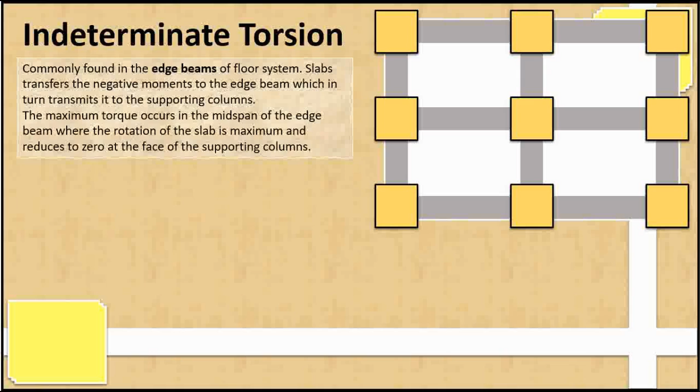Okay, pansinin natin itong floor plan na to. Sabi daw dito, nag-o-occur daw yung indeterminate torsion kadalasan sa edge beams natin. Pero hindi lang yung sa edge beams sa pagkakaalam ko, nag-o-occur din siya syempre dun sa ating mga middle beams. Kasi katulad na sinabi ko kanina, kapag naglagay ka ng beam dyan, tapos nag-produce ka ng load dyan, ang tendency is magpo-produce ka ng torsion about dito sa dalawang supporting beams niya. Ayun lang naman yun, pero ang kadalasan binibigay dito is yung edge beams talaga.

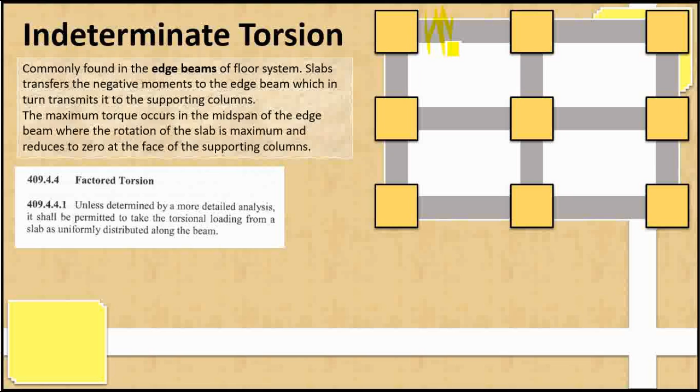Ayun, magbasa tayo ngayon ng mga code. So for the first code natin, factored torsion: unless determined by a more detailed analysis, it shall be permitted to take the torsional loading of the slab as uniformly distributed along the beam. Dito ang gagawin lang natin, hindi na natin bubusisiin kung ano yung mga torque na may experience per length ng beam natin. Hindi na natin papansinin yung variation ng torque along the beam, i-assume na lang natin siya agad as uniformly distributed.

Ayun nakukuha nyo. So proceeding sa next code natin, for the factored design torsion: if TU is greater than or equal to phi TCR and TU is required to maintain equilibrium, the member shall be designed to resist TU. In a statically indeterminate structure where TU is greater than or equal to phi TCR, and a reduction of TU in a member can occur due to the redistribution of internal forces after torsional cracking, TU may be reduced to phi TCR, where the cracking torsion TCR is calculated in accordance with section 422.7.5. If TU is redistributed in accordance with the section, the factored moments and shears used for design of the adjoining members shall be in equilibrium with the reduced torsion.

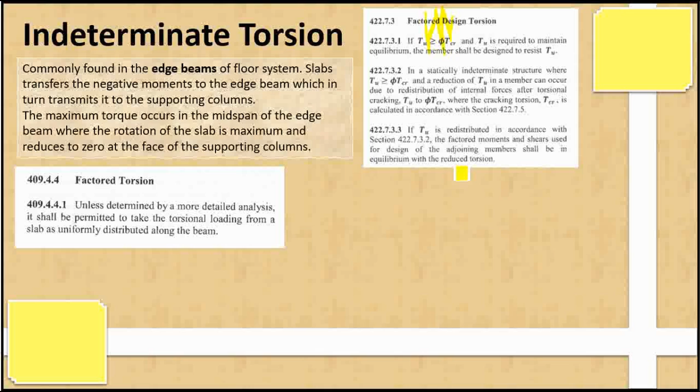So, ang haba, dami ko sinabi. I-define muna natin, alamin muna natin kung ano ba yung tinatawag dito ng cracking torsion. Ito yung cracking torsion natin, di ba natakpan ng beam? Yung cracking torsion daw natin, ito yung torsion na kailangan ma-experience ng beam natin, such as, magka-crack pa lang talaga yung mga extremes ng beam natin, kaya nga siya tinawag na cracking torsion di ba?

Ayun daw yun. So ang ibig sabihin ng factor design torsion na yung 422.7.3 na provision, ibig sabihin lang niya, kapag daw nag-exceed yung nakukuha na torque ng ating beam sa TCR niya, pwede na natin gamitin yung TCR as the critical torque na lang. Imbes na TU yung gamitin natin, TCR na agad yung lalagay natin kung nag-exceed yung TU natin dun sa TCR. Okay, and in turn, kapag ginamit natin yung TCR, i-redistribute natin ngayon yung uniformly distributed torque na ginamit natin. Mamaya, mas maiintindihan sana natin to kapag solve na tayo ng mga problem.

Alamin muna natin yung cracking torsion shall be calculated in accordance with table 422.7.5.1 for solid and hollow cross sections, pero ang gagamitin lang natin dito is yung solid cross section. At ang gagamitin natin dito is for non-prestressed member, which is ito. Pero kung binigyan naman kayo ng iba na hindi non-prestressed member, meron naman sa code, tingnan nyo na lang. Pero as for our case, ang gagamitin natin dito is itong non-prestressed member lamang.

Okay, may papansin nyo, meron tayo ditong dalawang unknown. Yung ACP natin, saka yung PCP. So ano ba itong dalawang to? Itong dalawang to is, for your information lamang, yung area na to and yung perimeter na to pertains to the gross section ng beam natin.

Okay, so gross section naman. So ano ba itong gross section na to? Bago tayo dumako dun, alamin muna natin itong code na to.

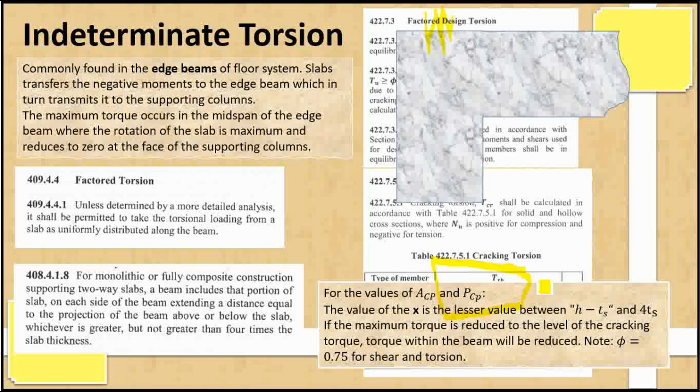Kung babasahin ulit natin yung code, di ba sinabi dito is projection of the beam above or below the slab. So yan yung H minus TS na yan. So dito sa slab na to, di ba ito yung slab natin? Ayan, yung slab natin to. Sa baba niyan, ito yung projection ng beam natin. Ito yung hina-highlight ko na section na to.

So ano bang height nito? Kung ito yung overall height ng beam natin, maminusan lang natin siya ng thickness ng slab. Therefore, H minus TS siya. And dapat yung value na yun is hindi dapat mag-exceed ng 4 times TS.

Pero ang alam ko, yung sinasabi dito na projection ng beam above. Kasi yung sinabi ko lang na to, below the slab lang siya. Yung above the slab na to, ito yun. Itong portion na to, okay?

Pero napakadalang kasi na mag-govern yung length na to. Kasi sabi dito sa code natin, pipiliin natin yung greater dito sa above and below. Pero dapat, yung value na makukuha natin sa dalawang yan is dapat hindi siya mag-exceed ng 4TS. Therefore, for simplification purposes, ang ginagawa na lang natin is i-compare natin yung H minus TS and 4 times TS. Kung sino yung mas maliit na value sa kanila, is sino yung mag-govern.

Okay, so I hope naintindihan nyo. Kung hindi nyo naintindihan, namnamin nyo muna yung slide na to. And if the maximum torque is reduced to the level of the cracking torque, torque within the beam will be reduced.

Okay, so ito yung sinabi ko kanina, na kapag daw nag-exceed yung TU natin, dun sa TCR natin, gawin na natin critical torque, yung mismo TCR natin. And, in turn, i-redistribute natin yung uniformly distributed torque.

Okay, so note that the phi, or the strength reduction factor, is 0.75 for shear and for torsion. All throughout the design process and analysis process, ang gagamitin natin na phi is yung 0.75. Pero, just for your information, nung 2001 kasi, ang ginagamit dito is hindi 0.75, kundi 0.85.

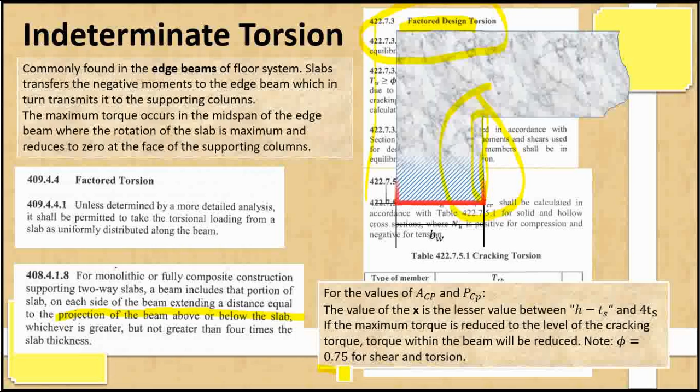So going back, ito yung magiging projected area natin. So ito yung magiging ACP natin, di ba? And itong X na to, ito yung sinabi ko kanina na H minus TS and 4 times TS. So ito yung ACP natin, and ito rin makukuha natin dito, yung PCP natin.

Therefore, pag kumuha tayo dito ng equation ng ACP and PCP, ang lalabas is ganito: ACP is equals to H times BW plus TS times X. Tapos, yung PCP natin is 2 times H plus BW plus X. Hindi ko naman na kinakabisa yan, kasi more on common sense lang to, and titignan mo lang talaga yung code.

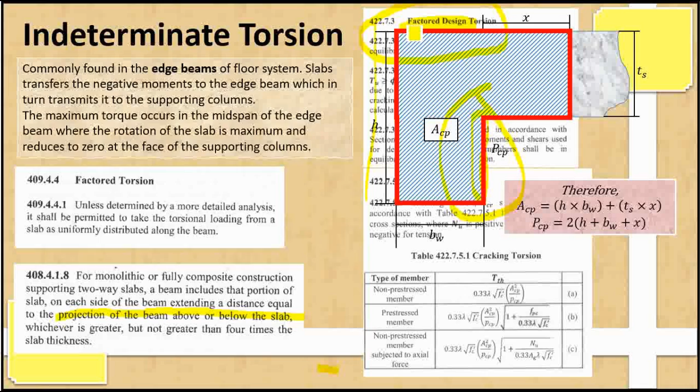Okay, ayun. Ito nga pala yung strength reduction factor na sinasabi ko kanina. Kung mapapansin nyo, parehas sa strength reduction factor for the shear and for the torsion, 0.75 sila parehas. A one-way slab floor system shown have stringers spaced at 4.2 meters on centers and loaded with a dead load of 5 kilopascals and a live load of 2.4 kilopascals.

The factored floor load is W is equals to, ginawa na niya palang W. So in-evaluate na niya, nakuha niya yung W na 9.84 kilopascals.

The slab is monolithically connected with the edge beams that are supported by columns spaced at L is equals to 7.5 meters. The beam width is 270 millimeters and the beam height is 500 millimeters. The columns are 500 by 500 millimeters.

Determine the torque at D equals 0.43 meters and at 2H equals 1 meter. Use FC prime equals 28 megapascals and the thickness of the slab equals 120 mm.

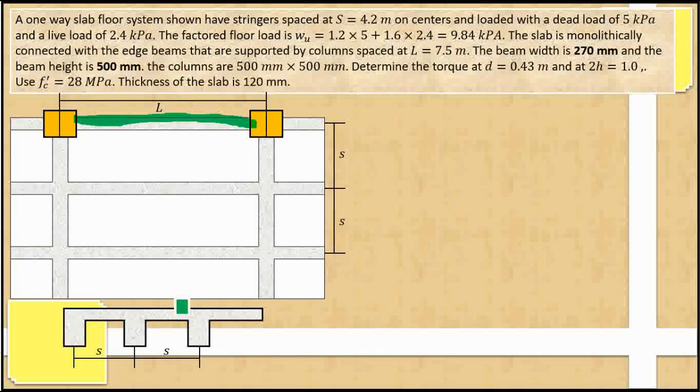So let's solve for the moments. For the moments, we'll use the ACI moment coefficient. We'll get the moment generated about this point.

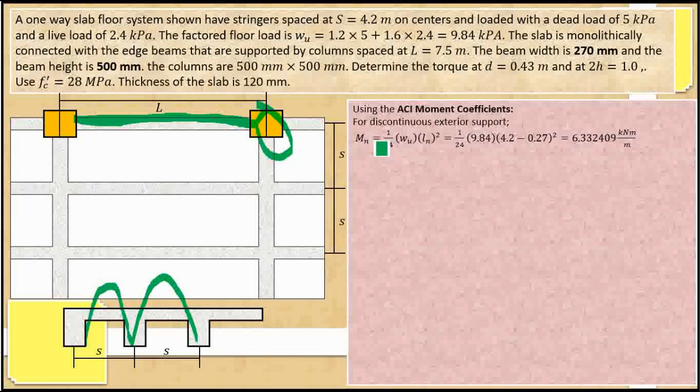In fact, what we get here is a negative moment equal to 1/24 WU ln squared, for discontinuous exterior support. So upon solving, we get Mn equal to 6.332409 kN-m per meter.

So what does this mean? Along the length of this beam, you will have a moment equal to 6.3324. That's why it's in kilonewton-meter per meter, because it's uniformly distributed along this beam.

So for the critical torque, TU equals 6.332409 times 7.5 minus 0.5 over 2, minus 6.33 times 0.43. So what does this equation mean?

This term here just takes the torque reaction. To get the torque reaction, we multiply 6.33 by the clear span. So 7.5 minus 0.5 — the 7.5 is center to center, and to get the clear span, we subtract one column dimension, which is 500 millimeters.

Then we divide by 2 to get the torque reaction, since it's uniformly distributed. Then we subtract the uniformly distributed torque multiplied by the value of D, which is 0.43 meters. So we get the critical torque at a distance D.

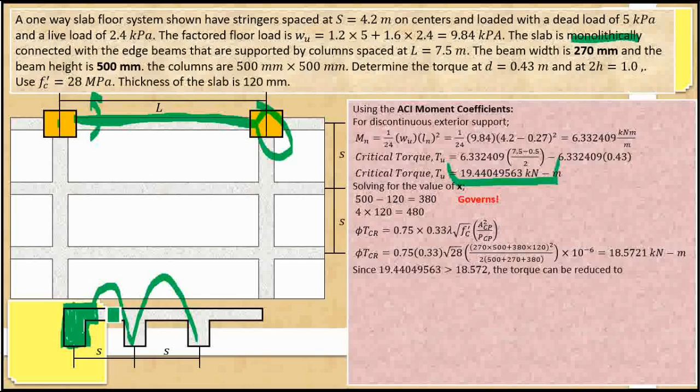Now since 19.44 is greater than 18.572, which is our cracking torque, the torque can be reduced to the cracking torque itself. Now we redistribute the torque since our TU has adjusted.

So the uniformly distributed torque applied to our beam will now change. We get it using this equation: T equals phi TCR over ln over 2 minus D.

So what is this? This equation is derived the same way we got the critical torque. What he did is rearrange this equation so that TU becomes 18.572, and isolated on one side is this 6.332409 — but this time, that value is unknown.

That's why we call it T. So upon solving, we get the new value of the uniformly distributed torque, equal to 6.04956 kilonewton-meter per meter. So we've adjusted it.

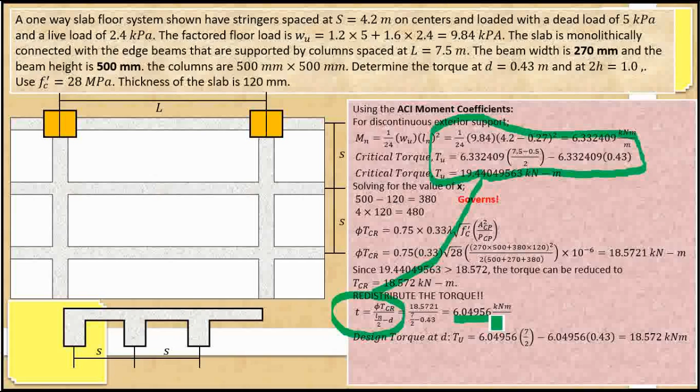Therefore, makakuha tayo ngayon ng bagong value for the design torque at D, which is equals to 18.572, and design torque at 2H, which is equals to 15.124 kilonewton meter. Okay, ito na yung magiging design torques na gagamitin natin for the design and analysis process.

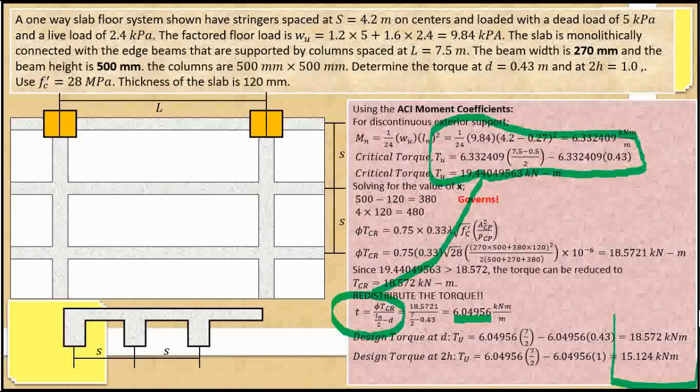Punta tayo ngayon sa threshold torsion. Dito, as the name says, ito yung torsion na kayang dalhin ng ating beam naturally, yung wala pang design. Kumbaga, by nature, ito yung kayang dalhin na torsion nung mismong section natin o nung mismong beam natin. Kung iisipin natin, kapag yung na-develop natin na torque dun sa beam ay hindi naman lumagpas sa threshold torsion, wag ka na mag-design talaga for torsion kasi di mo naman talaga kailangan. Kayang-kaya na pala ng beam na i-resist yung torsion na ma-e-experience niya, kasi hindi naman siya lumagpas sa threshold torsion natin.

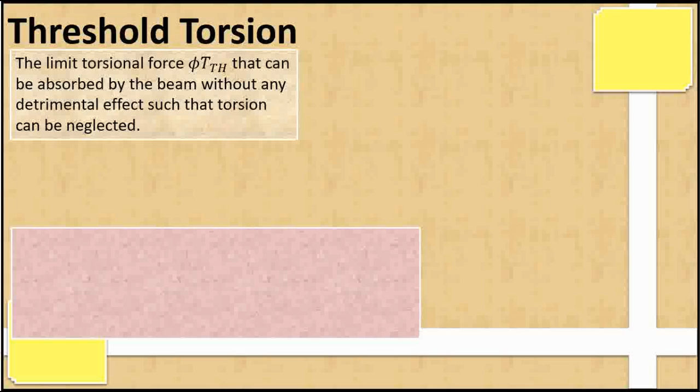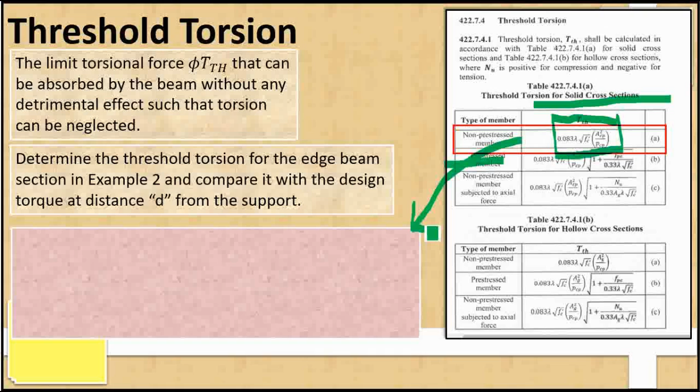So, for the threshold torsion, upon solving, kapag in-apply lang natin itong formula na ito, meron naman tayong value ng ACP at yung PCP as well as yung FC prime. Therefore, makukompute natin yung threshold torsion, which is equals to 4.671 kN-m.

Ayun, kung nagtataka kayo kung saan ba na-derive itong mga formula na ito ng threshold torsion, pati yung cracking torsion, kasi kung mapapansin nyo, di ba magkapares na sila? Well, it came from the concept of shear flow talaga. So kung gusto niyong malaman, okay lang din naman, pero hindi ko na siya sisingin dito kasi medyo out of scope na yun. Medyo mahabang usapin kung i-discuss ko pa kung ano yung shear flow. Yung shear flow ay matatandaan nyo sana from the strength of materials subject. Ayun, dun lang naman ang galing ng threshold torsion na ito.

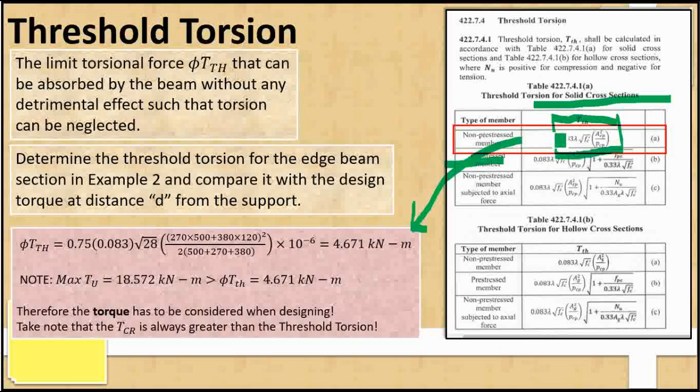At since mas malaki siya dun sa ating threshold torsion, ang mangyayari ay i-consider na talaga natin o i-design natin yung torsion natin, kasi hindi natin siya pwedeng i-neglect. Therefore, the torque has to be considered when designing. Take note that the TCR is always greater than the threshold torsion. Therefore, dun sa TCR pa lang, nag-check na tayo kung lumagpas ba yung design torque natin dun. Kung lumagpas na yung design torque natin o yung pinakauna nating design torque sa TCR, hindi na natin kailangan i-check kung naglumagpas pa siya sa threshold torsion, kasi by nature, mas mataas ang cracking torsion kaysa sa threshold torsion natin. Therefore, matic na kailangan mong i-design talaga for torsion yung ating section o yung ating beam.

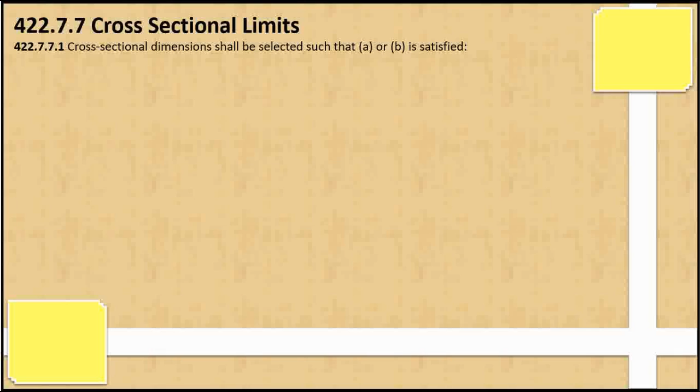Okay, so for the cross-sectional limits, meron tayong susundan na code. Cross-sectional dimension shall be selected such that A or B is satisfied. Okay, for solid sections, ito yung magiging formula. And for the hollow sections, ganito yung magiging formula natin. Ito lang yung gagamitin natin. Okay, so for solid sections lang, which is ito.

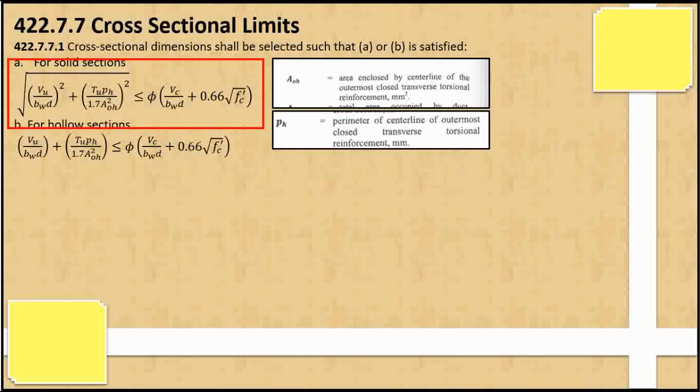Kung papansin nyo, meron naman tayong dalawang bagong variables, which is yung pH at yung AOH. Ano yung pinagkaiba nila? So, the AOH ay ang area enclosed by the center line of the outermost closed transverse torsional reinforcement, at pH ay ang perimeter of the center line of the outermost closed transverse torsional reinforcement. Ano ibig sabihin nyan? Ito yun, given siya by this figure. Yung AOH natin ay yung mismong core na ine-enclose nung ating transverse torsional reinforcement, kasi di ba stirrups ito, at mag-form yung stirrups natin na parang hoops, di ba? So ito yun, yung na-enclose ng stirrup na ito ay yung AOH natin, at yung pH natin ay yung perimeter nung mismong core na ito.

In which the dimensions are the center line of the opposite stirrup bars, which is our XO and YO, kasi measured sila mula doon sa center line. Kung mapapansin niyo, di ba?

Balik tayo dito ngayon sa formula natin. Pansinin natin itong second term na to, where the value of VC for simplified computations - kung maaalala niyo sa shear, for simplified na VC, ito daw yung formula niya: 0.17 lambda square root of FC prime BW times D. Yung lambda natin is pwede na natin iset as 1, kasi kung for normal weight of concrete, which is kadalasan yun naman yung ginagamit natin, magiging 1 lang yung lambda natin. At yung 0.17 natin, magkakaroon niya ng magic mamaya.

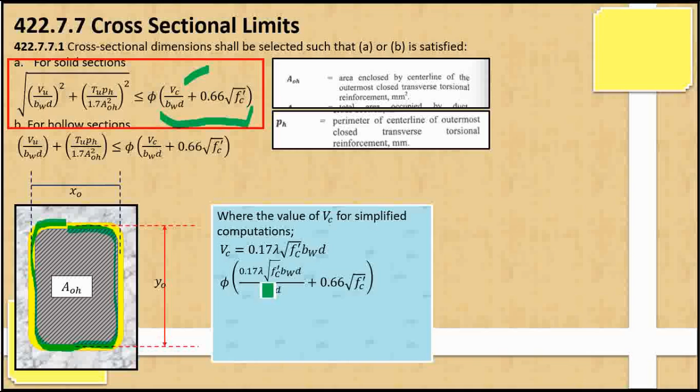Pwede natin ipalit to, isubstitute natin yan dito, and ito yung magiging result ng equation. Tapos, makakancel natin dito yung BW and yung D. BW and D is cancelled. Matitira na lang dito, technically, is 0.17 square root of FC prime plus 0.66 square root of FC prime. Ngayon, pwede natin ipag-add yung dalawang yan.

Para sa more accurate solutions, ang gagawin natin is gagawin natin silang fractions, kasi katulad nga sinabi ko sa inyo kanina, yung codes na ginagamit for 2015 NSCP is same lang naman halos sa 2001. Ang pinaka-difference talaga nila is ginawa lang nila tong decimal, compared sa dati na naka-fraction form. So yung 0.17, pwede natin yung iset as 1/6 and yung 0.66 galing lang sa 2/3, di ba? Therefore, kapag pinag-add natin yung dalawang yan, ang magiging resulting equation natin is 5/6 square root of FC prime. Mas madali itong tandaan kesa dito, di ba?

Ngayon, himayin pa natin lalo itong equation na to, o itong sinasabi ng code natin ng NSCP. Ganito kasi yan - itong section na to, ito yung tinatawag natin na developed stresses. Ito yung stress na dadalhin ng ating section. Tapos pwede natin siya hatiin sa dalawa. Yung unang term natin, which is VU over BW times D, is yung para sa shear, di ba? Kasi kung mapapansin niyo, VU nga eh, so therefore shear yung kino-consider natin dito.

Tapos itong equation na to, na-derive lang naman to sa force over area, di ba? Itong VU na to, ito yung shear force at that specific section. At yung BW times D, ito yung area, di ba? Ano, may formula ng stress? Yung force over area, ganun lang din yun.

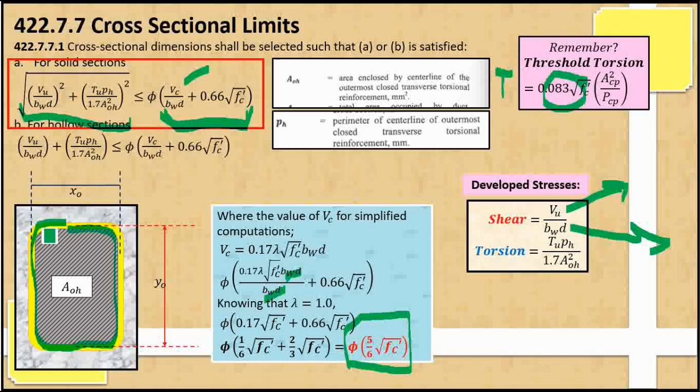Ang pinagkaiba lang, dun sa threshold torsion saka sa cracking torsion, ang kino-consider natin is yung gross section ng beam natin. Samantalang dito sa developed stresses, ang kino-consider natin dito is yung core na nung ating beam mismo, which is yung na-enclose nung stirrups natin. So yun lang ang pinagkaiba nila, pero magkakahawig lang talaga sila.

Diba? So kung ang tawag dito sa dalawang to is the developed stresses, ano tawag dito? Tawag mo dyan is the resistance of concrete, where the shear is VC over BW times D. Kasi tandaan niyo, yung VC, ito yung shear na dadalhin ng concrete natin. Tapos yung torsion is 0.66 square root of FC prime, so ang dadalhin lang daw na torsion ng ating concrete is 2/3 lang ng FC prime natin dapat.

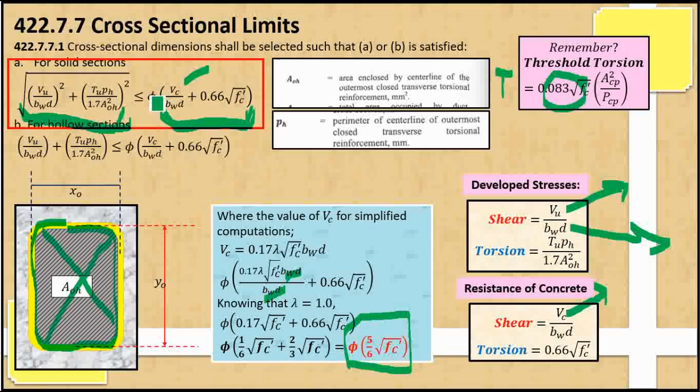Okay, so paano natin magagamit to? Dapat daw, yung developed stresses daw natin is less than or equal to dun sa resistance ng concrete natin. Bakit? Kasi ganito, kapag nag-exceed yung developed stresses natin dun sa resistance ng concrete, mawawasak yung mismong concrete ng beam natin. Therefore, kailangan mo i-adjust yung beam sizes natin bago natin siya i-design for torsion muna. Kailangan kasi maging adequate yung section na yun to resist torsion.

Okay, so punta tayo sa problem solving. So itutuloy natin yung problem natin kanina.

Check the audacity. Ha? Bobong putik. Mali yan. Adequacy to. Ano to, lutang na ba ako?

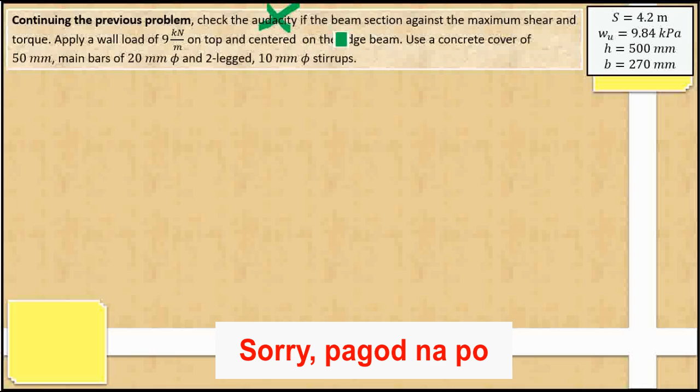Check the adequacy of the beam section against the maximum shear and torque. Apply a wall load of 9 kN per meter on top and centered on the edge beam.

Use a concrete cover of 50 mm, main bars of 20 mm diameter, and two-legged 10 mm diameter stirrups. So, these are the data we obtained earlier that we can use now.

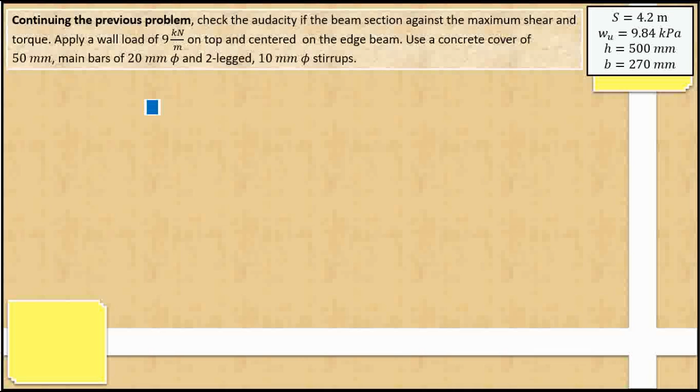Floor load equals W times L over 2, where W is 9.84 over 2 times 4.2 minus 0.27. Take note, if you don't remember the figure, this is what it looks like: this is our edge beam, we have a supporting column here, and this is our S. We divide by 2 because the edge beam only carries half of the tributary area. And we subtract 0.27, the beam width, because we only need the clear span of our beam.

Now for the beam weight, since this was just the floor load and doesn't yet include the beam weight, we compute the beam weight: 0.27 times 0.5 times 24, which gives 3.24 as our beam weight.

For the total beam load, we add it now: 19.336 plus 1.2 times 3.24 plus 9. Take note, it's 1.2 because both are dead loads — the beam weight and the floor load, which we computed earlier as 9.84 in the previous problem. So for the total beam load, we get 34.024 kN.

Now, for the shear force at a distance D from the support, we solve it using W times L over 2, which gives the reaction at the support, minus W times D. This brings us to the shear force at distance D — I hope you still remember or can visualize the shear diagram. The result is 104.45 kilonewtons.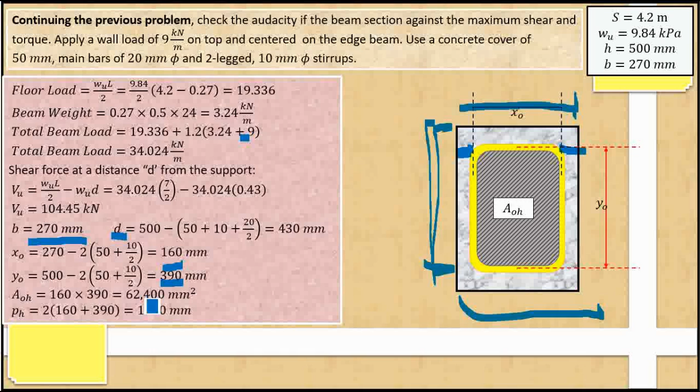Now we get the value of our developed stresses. For shear, it's VU over BW times D. VU was computed earlier as 104.45, times 1,000 to convert to Newtons, over 270 times 430. This gives us 0.9 megapascals.

For torsion, it's TU times PH over 1.7 times AOH squared. We have TU and PH, multiplied by 10 raised to 6 to convert to Newton-millimeters. The answer is 3.08 megapascals — these are our developed stresses.

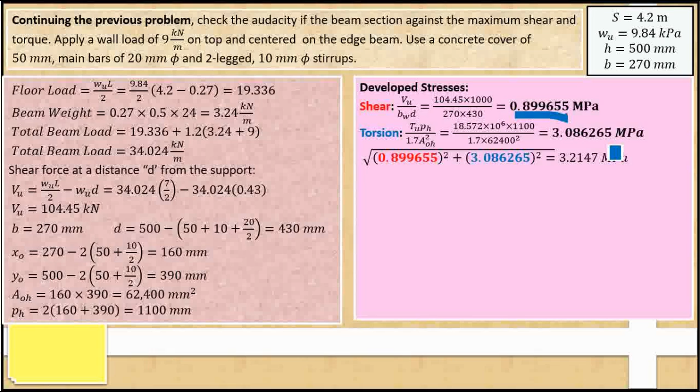To get the overall or combined stress experienced by our beam section, we use the Pythagorean theorem, and we get a value of 3.2147 megapascals.

Now we get the resistance of the concrete, given by the formula we derived earlier: phi times the quantity 5/6 times square root of 28. This equals 3.307 megapascals.

Since our resisting stress is greater than our developed stress, the section is adequate to be designed for torsion. Therefore, we won't make any revisions to the beam dimensions, and it's okay to design it for torsion.